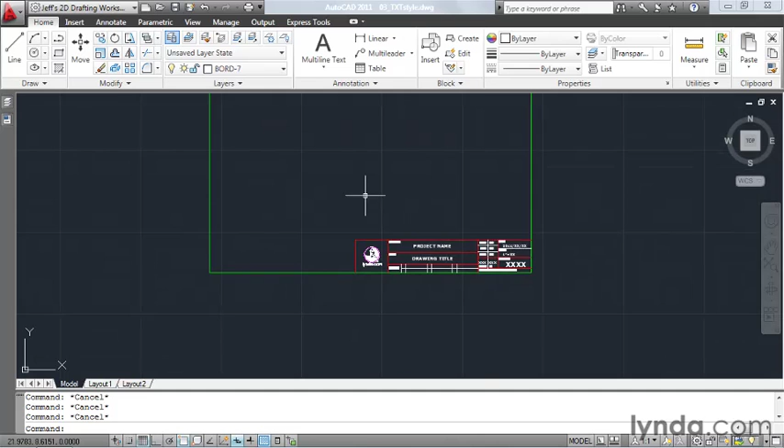On my screen, I have a drawing that represents a title block. Typically, when we think about title blocks, we think about text. I'm going to zoom in on the bottom of this drawing such that this text is a little bit easier to see, because I want to mention that the appearance of the text objects in this title block is being controlled by a couple different text styles.

For instance, I have created a style for this large title text, and I've created another style for the smaller text labels. Let's create a new style so we can see how the process works. To create a text style, I'm going to move up to the annotation panel, and I'll click this flyout.

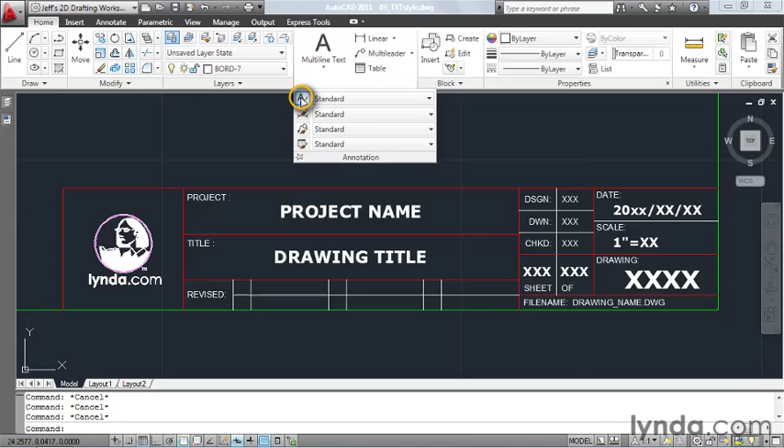And right here I can see the name of the current text style. Right now that's Standard. All AutoCAD drawings start with a Standard text style, because you have to have at least one style in order to create text. To create a new style, I'll click the text style icon. This brings up a dialog box that I can use to build my new style.

Notice that the current style is listed right here. In this box on the left, I can see a listing of all of the text styles that are defined in this drawing. If I select a style from this list, I can see a preview of that style right down here. On the right side of the dialog box, there are some buttons that I can use to manage my styles. As you can see, I can set a style current, I can create a new text style, or I can delete an unused text style.

Now, I would like to create a new style, so I'll click the New button, and then I'll give my style a name. I'm going to call this General Notes. It's always a good idea to make the name of your style descriptive of what the text is used for. Let's click OK, and now that my style's been created, I can use these settings in the middle of the dialog box to control the appearance of this style.

I'm going to start by selecting a font. To do that, I'll click the font name flyout, and then I can click and hold on this slider, and I can drag up and down through the font list. And as I drag through here, notice that some of these fonts have a caliper next to the font name, and some of these have a TT icon next to the name. The caliper represents that this font was installed with AutoCAD, and the TT stands for TrueType. This is a Windows font.

Now, everybody's system is a little bit different, so you may see different font names in my list than you see in yours. I would like to select an AutoCAD font. I'm going to scroll down here to find Simplex, and I'll select that font from the menu.

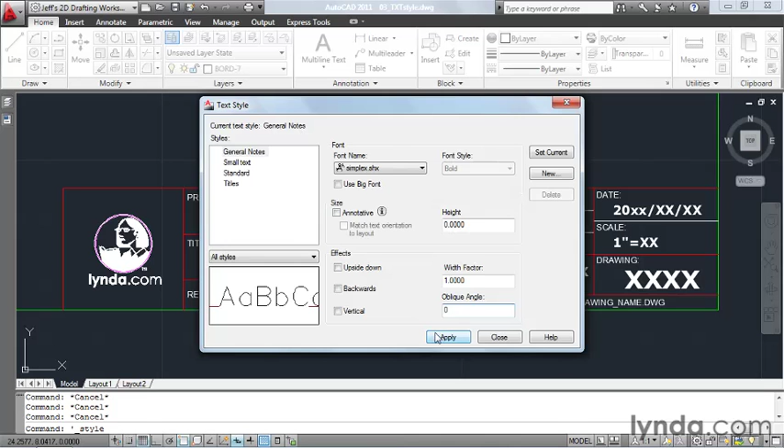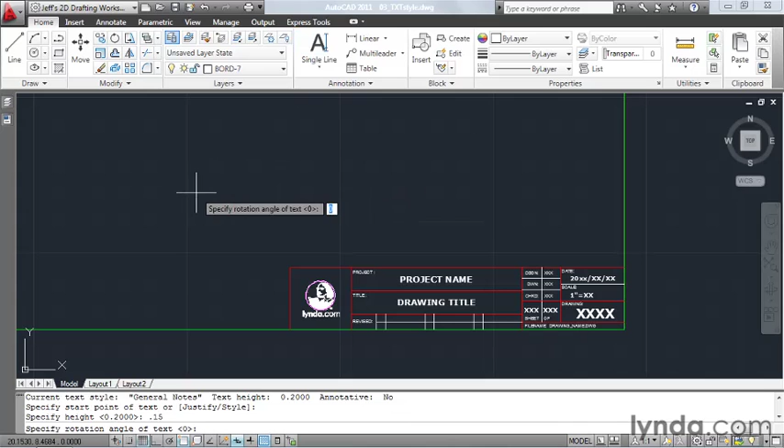Let's back up a little bit, and I would like to create a single line text object. To do that, I'll click this flyout, and I'll select Single Line. I'd like to start my text right here, and I'm going to use a text height of 0.15, and I'll hit Enter. And then I'll hit Enter to accept the rotation angle of 0. This is what the General Notes style looks like. Enter, Enter. It's important to note that since the General Notes style is current, all text that I create from this point on is going to look like this.

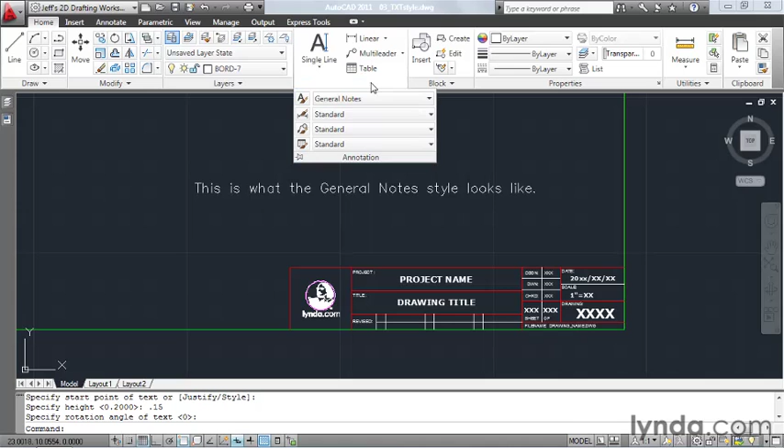Now, if I'd like to set a different text style current, I can do that by opening up the annotation panel, and then I'll click the text style flyout, and from here I can select from any of the other text styles in this drawing. I'm going to set Titles current, and then I'll create another single line text object. I'll start right here, and then I'll hit Enter to accept the default. This is what the Titles style looks like.

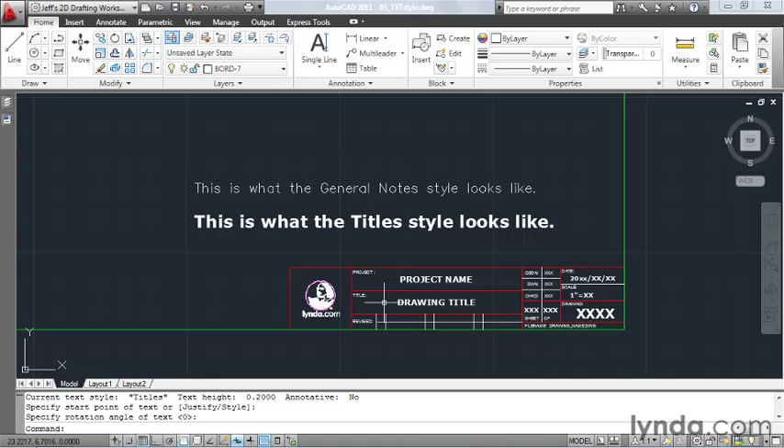Enter, Enter. Now, I created this style a little bit ago when I was working on this title block. This style is being used to control the appearance of these large titles. Now, you may be wondering why text styles are important. Well, text styles give us more freedom over the appearance of our text objects. You see, if you modify the properties of a text style, all of the text that was created using that style will update. Let's try that.

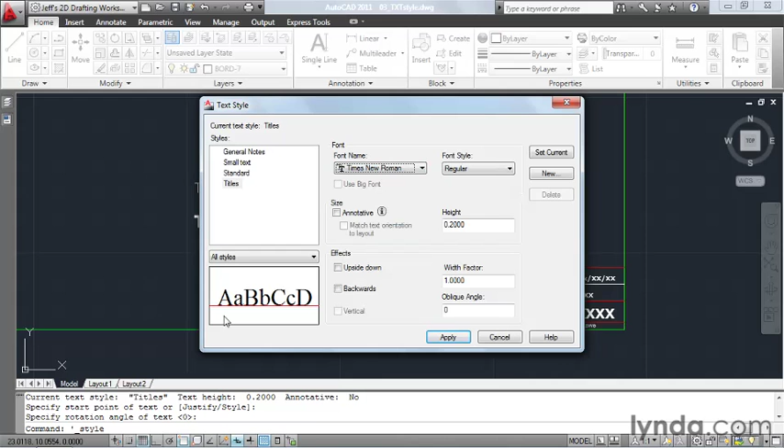I'm going to open up the annotation panel. Then I'll come down and click the text style icon. Right now the Titles style is current. Let's assign a different font to this style. To do that, I'll open up the flyout, and I would like to select a Times New Roman style. And instead of clicking and dragging through this slider, I'm just going to type the letter T. And notice that AutoCAD will take me alphabetically to that point in the list. We can see the new preview right down here.

Let me drag this box up a little bit, and I'll click Apply and Close. And notice that all of the text that was created using the Titles style has updated on screen. Now, if for some reason your text did not update, all you have to do is regen your drawing. Simply type RE and press Enter to update your text. Text styles control the appearance of all of the text in our drawing. As you can see, by making a simple modification to a style, we can automatically update all text that was created using that style.